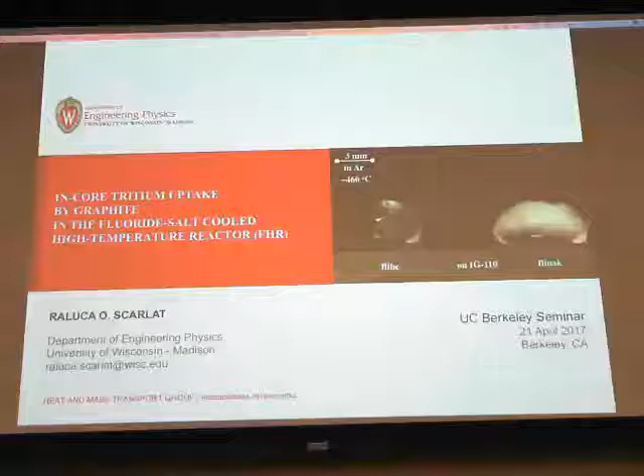She was an undergraduate at Cornell University in chemical engineering. She did her doctoral work here under Per Peterson. Before her doctoral studies, she worked at GE and ExxonMobil.

In 2011, she advised Hitachi GE in Japan on post-Fukushima changes to severe accident guidelines for the Japanese fleet of reactors. In her current work, she studies thermal hydraulics, chemistry, and mass transport in molten fluoride salts. She works in heat and mass transport, thermal hydraulics, nuclear reactor safety, design, and engineering ethics.

I had the privilege in 2013, we were both Minner Fellows, the Warren and Marjorie Minner Foundation, which gave a large grant to the university to sort of instate engineering ethics into the curriculum here. And so we spent a week together with Professor Junhong Han, Bill Kastenberg, and other experts in engineering ethics here as well. She has a great commitment to engineering ethics, has created curricula and so forth.

Without further ado, the title of her colloquium today will be In-Core Tritium Uptake by Graphite in the Fluoride-Salt-Cooled High-Temperature Reactor, FHR. Thank you very much for the introduction, and thank you everybody for being here and for coming here on a Friday afternoon.

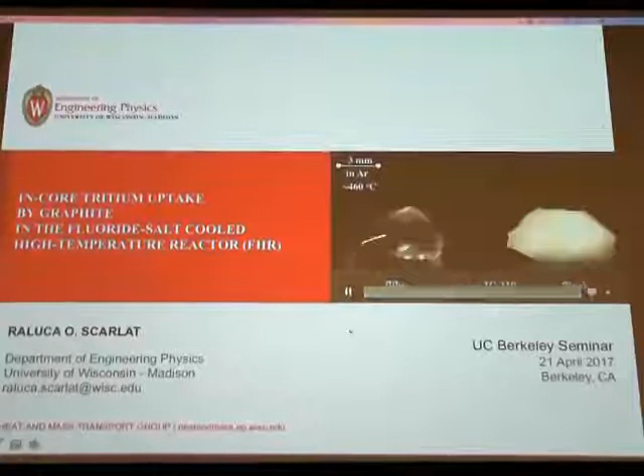Molten salt media are used for separation, so pyroprocessing, and they've also been proposed as coolant for fusion and fission reactors. And so to give you an idea of the type of materials that we work with in my group, is it possible to turn down the lights just a little bit just for a second?

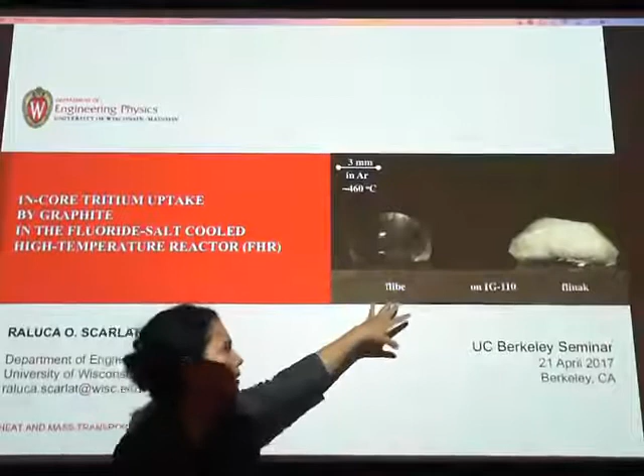And so what you see here are two droplets of salt that are melting on a nuclear graphite surface. This is flibe, and you can see that this salt is recirculating. And what's remarkable about this is that this is a 3 millimeter droplet. The movie is sped up about 8 times, so it's a little faster than real time. And the temperature gradient is probably very small.

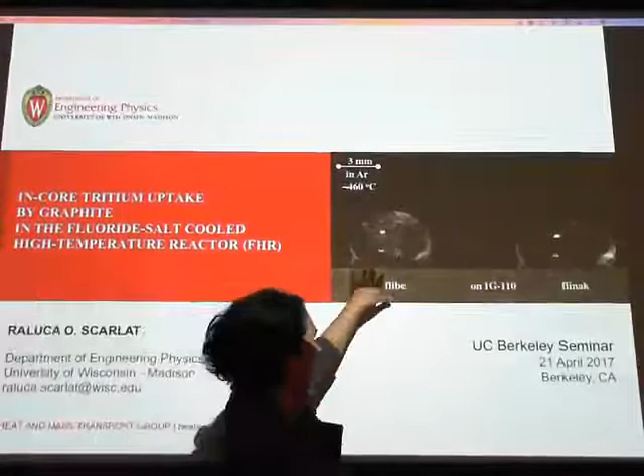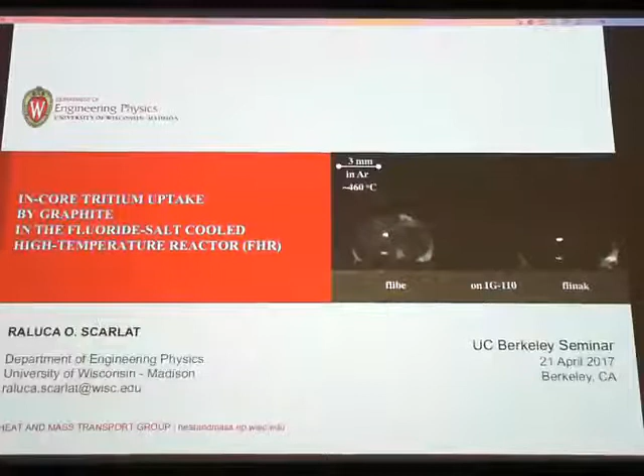What's happening here is that the surface of the droplet is radiating out to a colder lid, and the bottom of the droplet is hot, and that very small thermal gradient is creating a recirculation within the pebble. What's also remarkable is that you see this skin that's forming, and that's the frozen liquid that's melting and freezing and melting and freezing. And so these are some of the problems that I study.

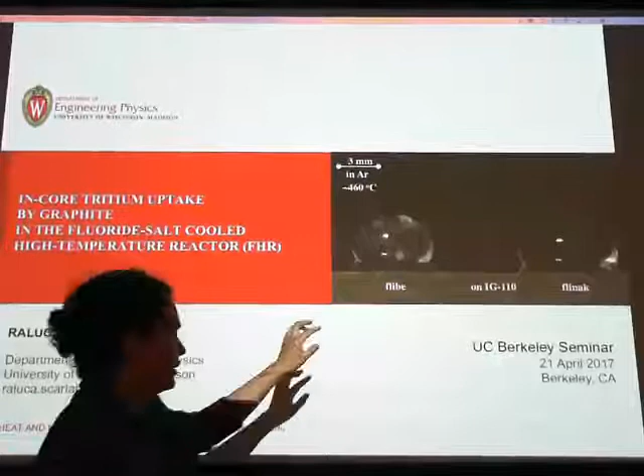How do isotopes transport between phases, between liquids and solids, and between gases and liquids and solids as well? It's harder to see, but there are bubbles in there as well circulating. So we'd like to know how isotopes transport. And also what's remarkable is that these droplets that you see are at 460 degrees Celsius, and they're at atmospheric pressure. And so we can do high temperature separations and high temperature reactors at atmospheric pressure, which has an inherent safety advantage.

So that's one of the motivations of studying these kinds of liquids, is that they have inherent safety features and passive safety features. Now another motivation is that we really need clean sources of energy quickly, and we need to make sure that the new sources of energy that we come up with are clean and sustainable.

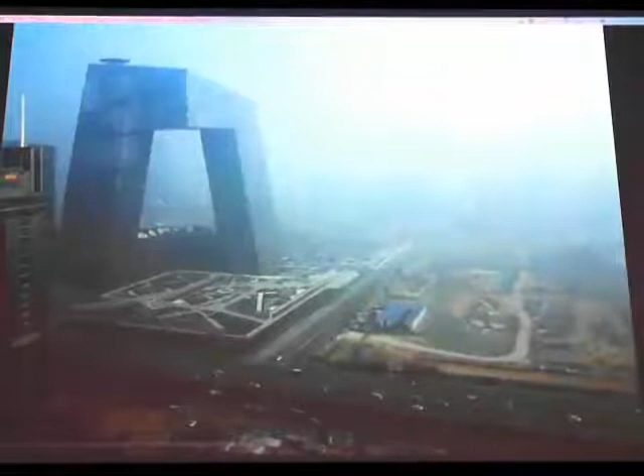And so we have to figure out the safety analysis of the reactors as well as the entire fuel cycle, and to make sure that we're not making a bigger mistake than we've already made with other sources of energy. So that is the background and the motivation of the work that I do. And so now I'll tell you about one of the problems that I tackle, which is tritium transport in a specific system, namely reactors that are cooled with molten salts and that have solid fuel.

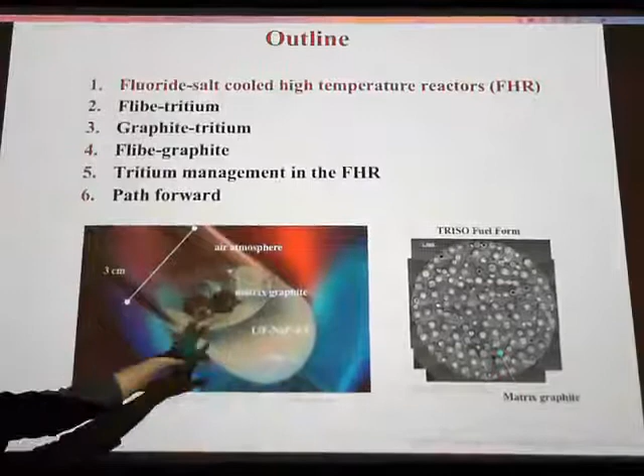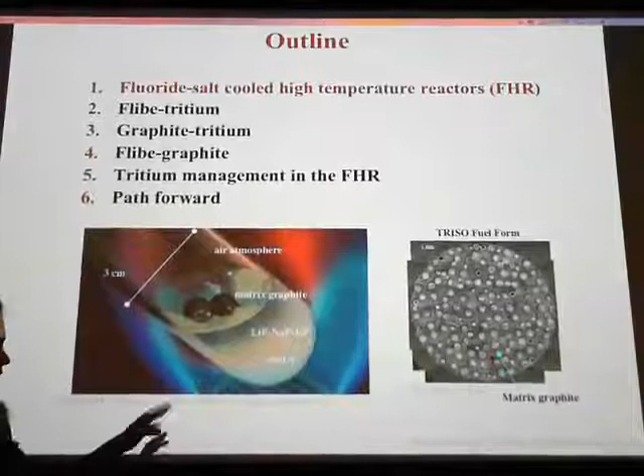And so it's in air. Obviously, it's not blowing up or exploding or combusting, so that's good. This fluid is inert in air. However, it is changing chemistry slowly, and so you can see that there's some sedimentation here that comes from the fact that you're beginning to form oxides from air exposure. And so that's going to begin to change the chemistry and the way radioisotopes partition within your fluid. And so most of the work that we do is in an argon atmosphere, in an inert atmosphere.

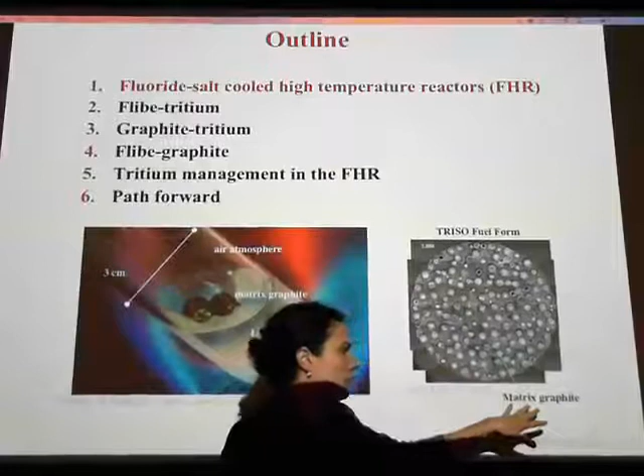And then this is a cross-section of what a fuel element would look like. You would have TRISO particle-encapsulated fuel that retains fission products within the particle, and these particles are embedded within a graphite matrix. And so I highlight the graphite matrix because what we study is the transport of tritium from the salt into this graphite matrix.

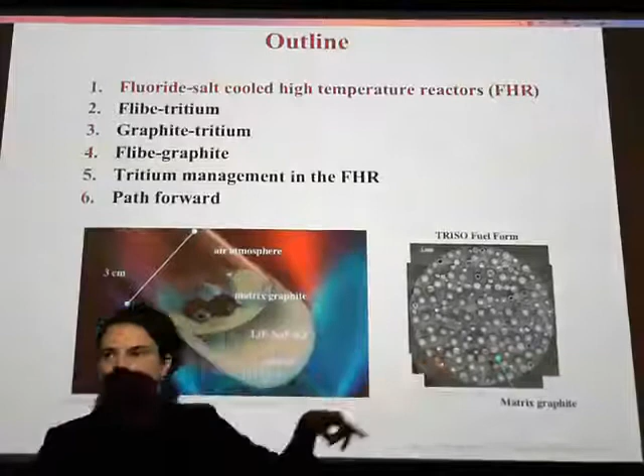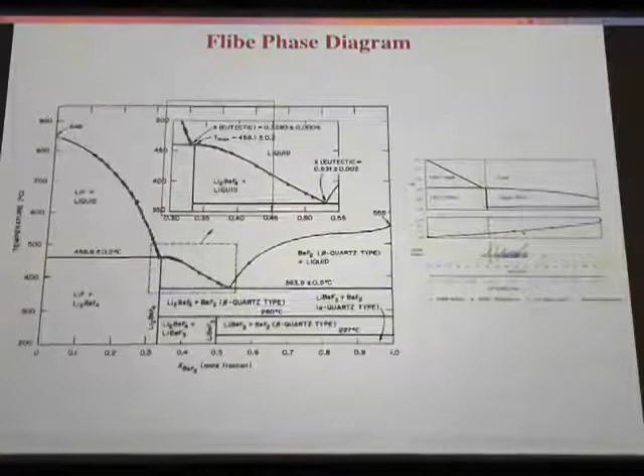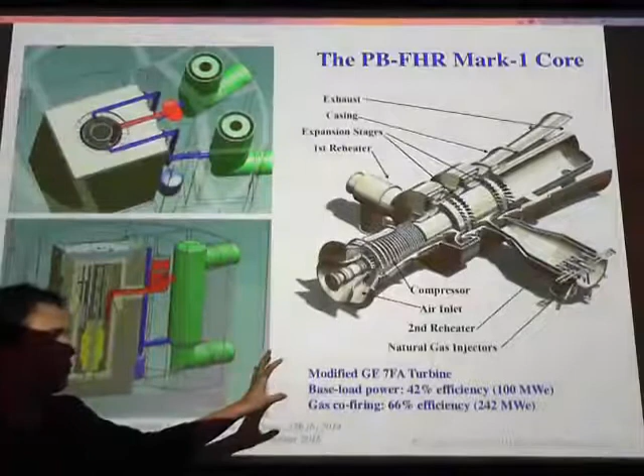So that being said, if you take this coolant and this solid fuel and put them together, this is what a reactor design might look like. You actually start the design from the turbine and then design a reactor to fit the turbine. And there's so many of you here that have been part of generating that design that I will just say that this enables us to produce peak power with nuclear energy, which puts nuclear energy in a different market, which then gives it maybe a bigger chance of competing with fossil fuel and displacing fossil fuel as a source of energy. And so that's a good reason to work on this technology, to try to make it work.

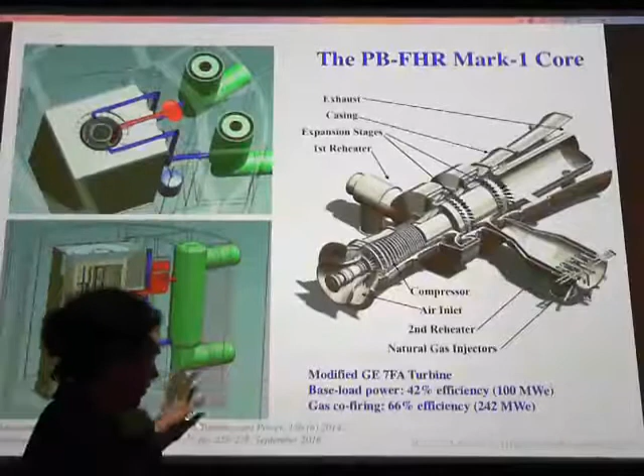And then this is applicable to fission systems. It's also applicable to fusion systems that might use the same coolant for tritium breeding and also for heat removal. And so the fact that these coolants remain single phase up to high temperature enables them to run gas turbines, which can then do power peaking by gas co-firing.

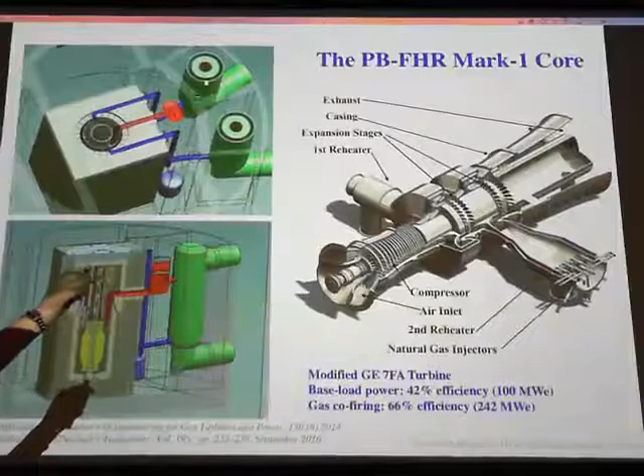So this is the system that we have. Here's a core. The salt flows in, down, up, out, and over to a salt-to-air heat exchanger. This is a pebble bed with fuel, and so the salt flows through the pebble bed. As the salt is irradiated by neutrons, it produces tritium, and then tritium travels to the salt-to-air heat exchangers.

The tritium production in coolants is not unique. All reactors produce some amount of tritium of some sort. But what is unique is that we're at high temperatures, and at high temperatures, metallic components are transparent to tritium. So since we have a salt-to-air heat exchanger, the tritium will leak into the air, which will then reach the turbine and be sent up the stack. Since this is an open-air Brayton cycle, you send all the tritium that goes into your turbine up the stack.

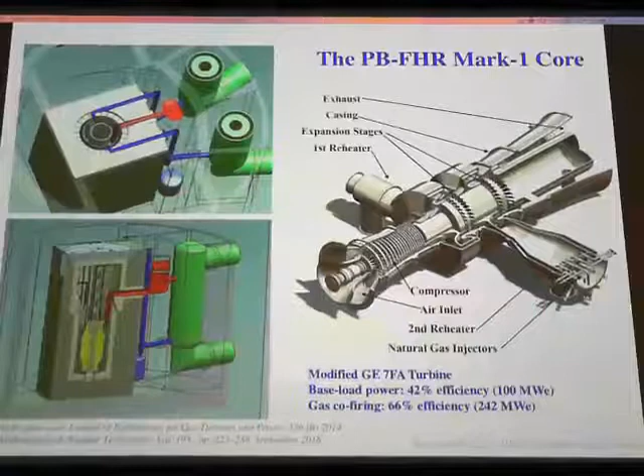And so we need a sink for tritium. And so maybe that sink will be the fuel elements themselves. And that would be a good sink to have, because the fuel elements are removable, and so you have a renewable tritium sink. They have a high surface area by design because they need to remove heat from the fuel, and so mass transport will also be advantageous in that sense. And then they're graphite, and we know that graphite has some affinity for tritium.

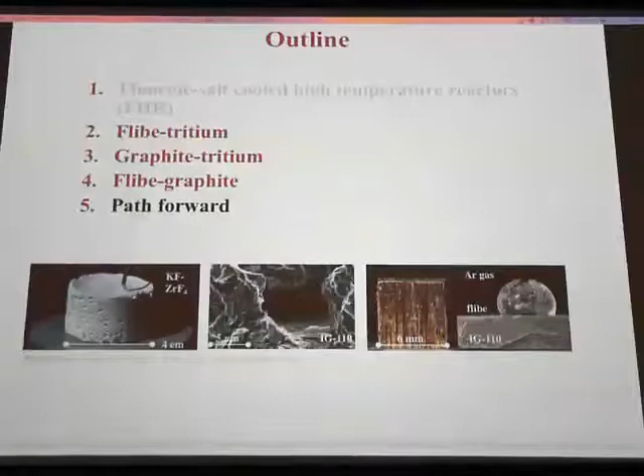And so then we set off to answer this question: can we use the fuel element as a sink of tritium from the fluoride salts? So that's the question that we will talk about for the next half an hour. And there are three components here. There's tritium, there's salt, and there's graphite. We haven't yet run any experiments with the three of them together, but we've run experiments 2 by 2. So I will show you the 2 by 2 experiments, and then at the end, I'll tell you how we hope to bring everything together into a joint experiment.

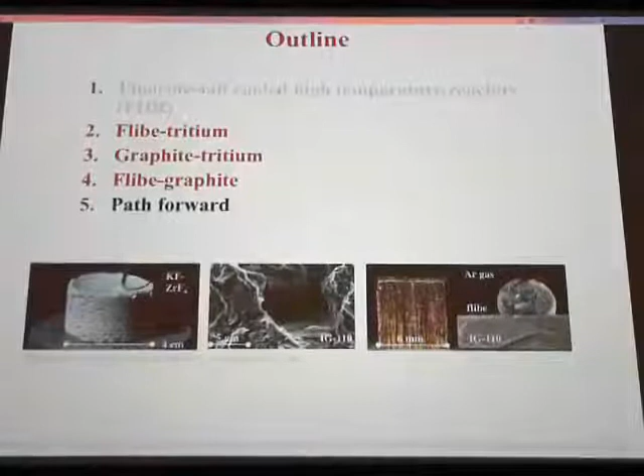So we'll talk about flibe and tritium. Flibe is the coolant of interest here, lithium fluoride, beryllium fluoride. We'll talk about graphite and tritium. Then we'll talk about flibe and graphite.

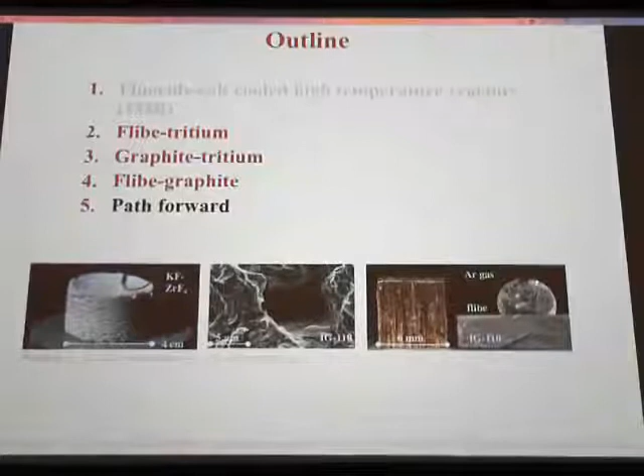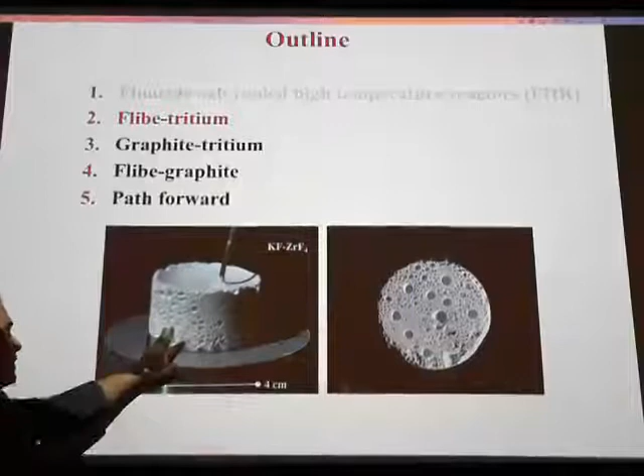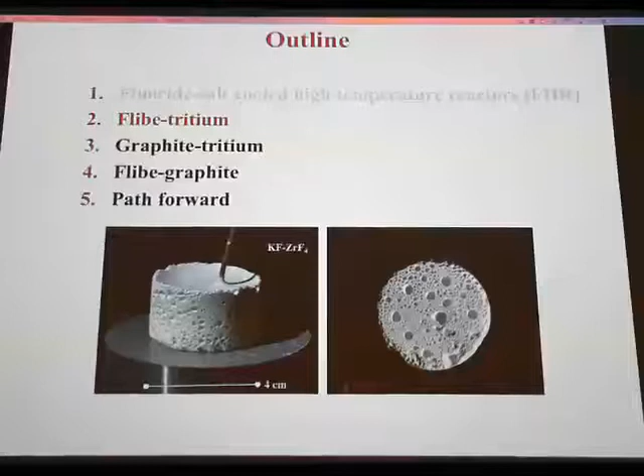So this is not a picture of flibe, it's a picture of potassium fluoride, zirconium fluoride. This is work that's sponsored by Terrestrial Energy. They're interested in thermophysical properties of these salts. And coincidentally, we managed to make a lot of bubbles in this salt. It wasn't our intention, but we did. And I thought that conceptually, it represents the idea that we're producing tritium in the salt, and tritium may be solvated, but it may also be in the form of bubbles. So that's the concept for the next set of slides: we're going to talk about the tritium that's produced in the salt.

However, we also have beryllium as a constituent of the salt, and the natural composition of beryllium is 100% beryllium-9. Beryllium-9, by n-alpha, will produce helium-6, which decays to lithium-6, and so you're continuously producing lithium-6 from beryllium-9. And there's nothing we can do about that. We can isotopically enrich lithium in lithium-7, but we can't do much about beryllium.

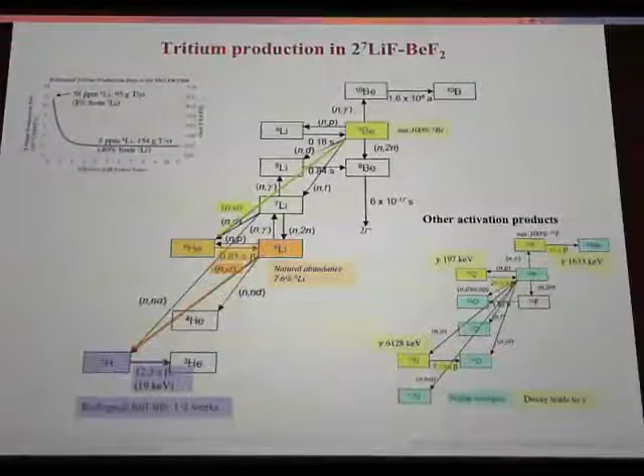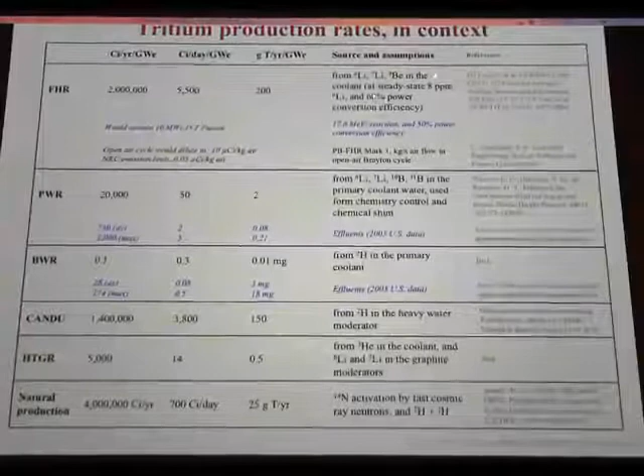And then to put into context the tritium production rates, they're about 200 gram per year per gigawatt electric. And this is assuming the steady state lithium concentration and 60% power conversion efficiency. Since I'm dividing by gigawatt electric, it's important to know the assumptions. So that would sustain about 10 megawatt electric of DT fusion. So in the fusion world, this is not a lot of tritium.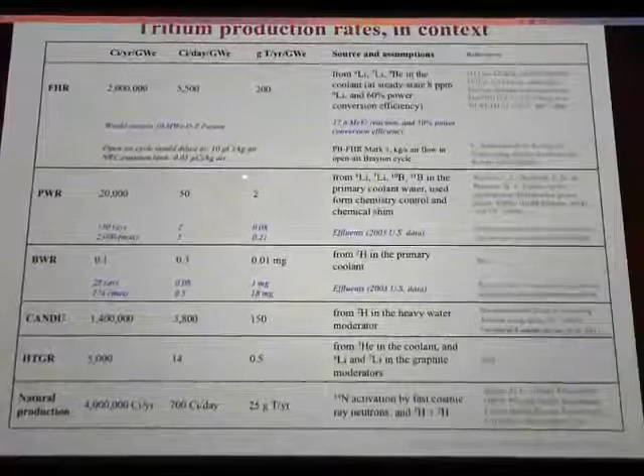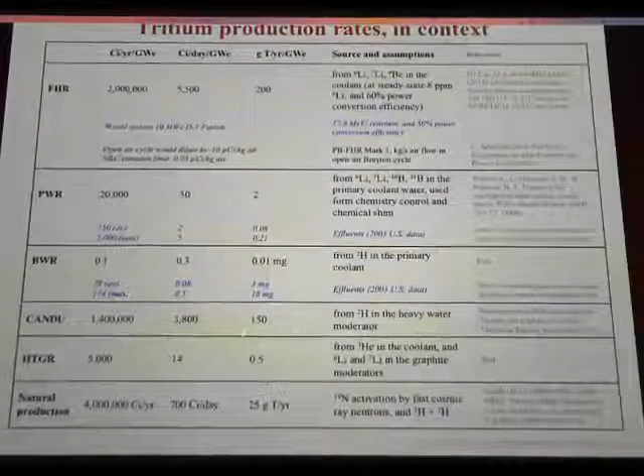However, if you compare it to PWR production, which is about 2 grams, it's a lot of tritium. If you compare it to BWR production, which is about a fraction of a milligram, again, it's a lot of tritium. CANDU is comparable, same order of magnitude. And high temperature gas cooled reactors produce tritium from the helium-3 in the coolant as well as from the lithium impurities in their graphite moderators. And so really any kind of system you can think of will produce tritium in some amount.

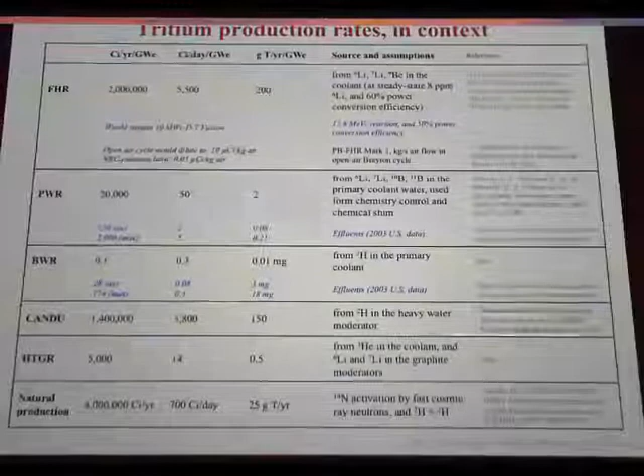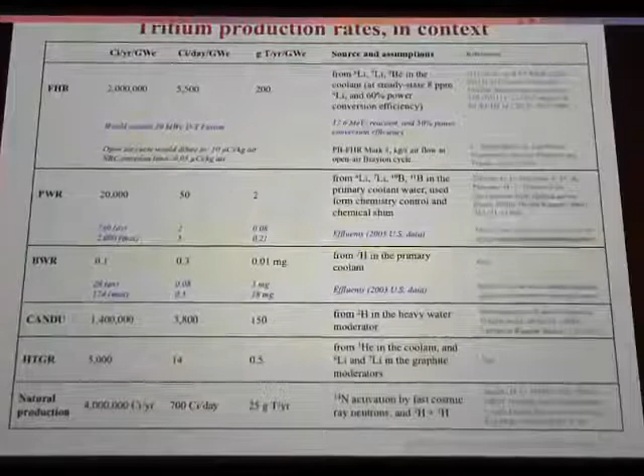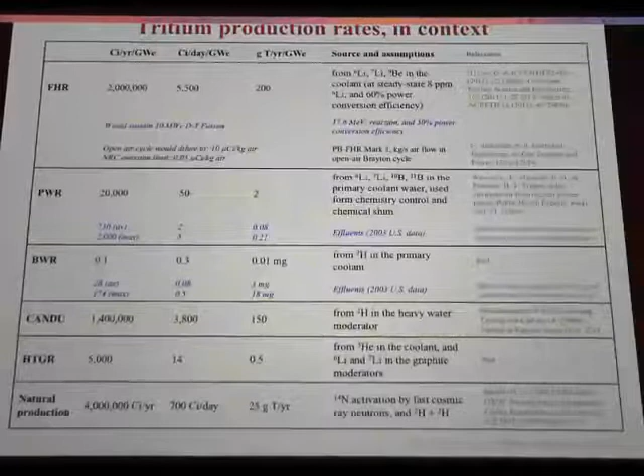Another point of reference to keep in mind is what is released. And so for PWR, there are liquid effluents that are released. The tritium comes from the lithium and the boron. Lithium is used for chemistry control in PWRs. Boron is used for chemical shim, and so that produces tritium. And since it's a water system with valves and pumps and systems that leak in some amount, eventually you end up with some liquid effluents that are released to the environment. And so it's a fraction of a gram per year per gigawatt electric for PWRs.

And then for BWRs, I found it interesting that on the NRC website there's some 2003 data of releases in the milligrams, but the production rate is estimated as 0.01 milligrams, so they must have somehow stockpiled in 2003 and accidentally released it. I don't know what the story is there.

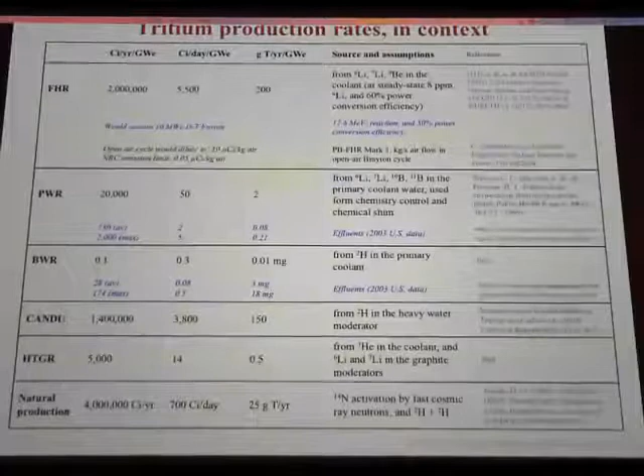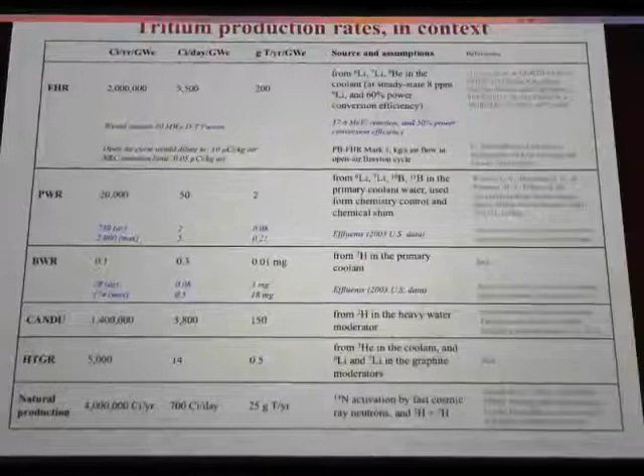And then, let's see, other interesting points of reference. If we were to release all of the tritium out the stack through the air turbine, that provides a dilution stream, just the gas that runs through the turbine. And that dilution would bring it down to 10 microcurie per kilogram of air. The NRC emission limit is 0.05 microcurie per kilogram of air, so we're not diluted enough. We definitely need to do something about the tritium. But regardless, we wouldn't want to send the tritium up the stack even if we had diluted it well enough.

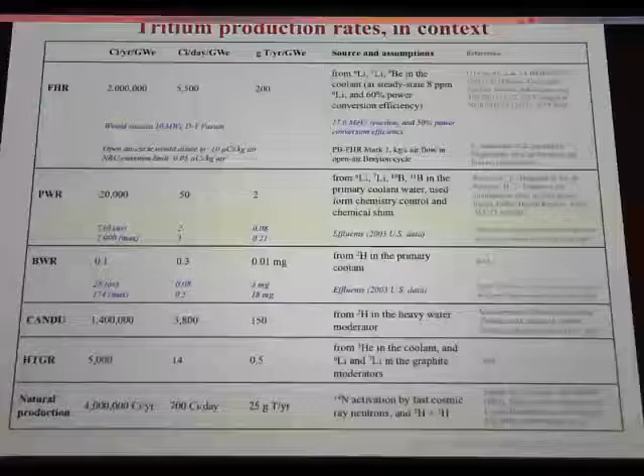And then also it's interesting to note that there is natural production of tritium from cosmic radiation. And it's about 25 gram of tritium per year, so in 1 gigawatt of FHR we produce 8 times that. Okay, so that gives us the context for how much tritium it is that we're producing. And it's produced in the core, and we would like for it to be removed before it leaks out of the heat exchanger to the airstream.

And in addition to having a sink in the system, it's also important to work on tritium permeation barriers on the heat exchangers. That's not going to keep the tritium in, but what it does is it allows you to tolerate a higher concentration of tritium in your primary coolant. And so if you have a higher concentration of tritium in your primary coolant, the residence time of tritium in your primary coolant is longer. And if your residence time of tritium is longer than the residence time of the liquid going around, then that means that you can use a fraction of your stream for your purification system.

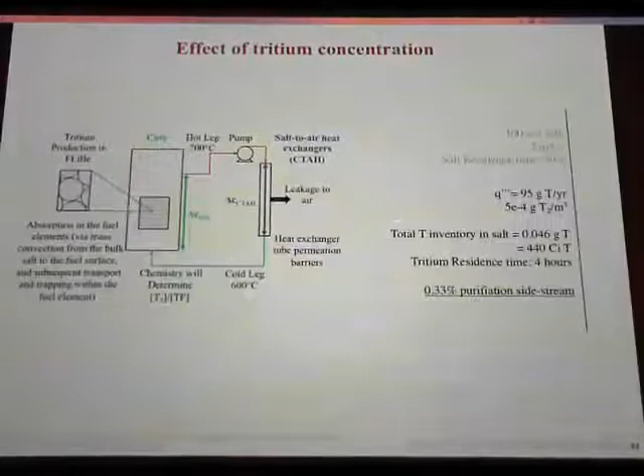So for example, if the tritium production rate is 95 grams of tritium per year, the concentration, let's say, is 5 times 10 to the negative 4 gram per meter cube, and then the total inventory is about 0.05 grams of tritium in the total primary system. We know the tritium production rates, and that gives us 4 hours of residence time for tritium in the core.

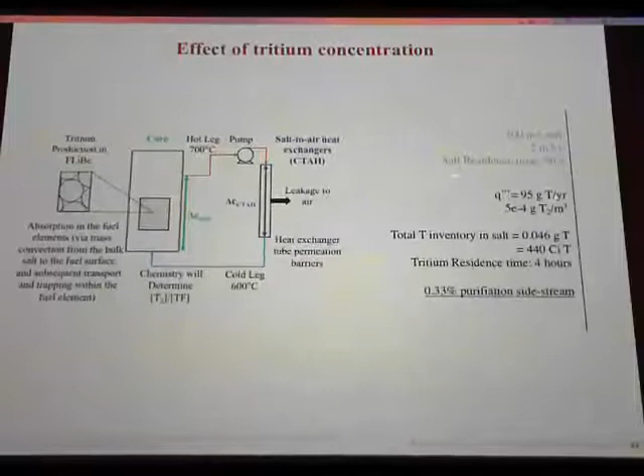We can run the same number on the coolant going around the core. If it runs at 2 meter cube per second, and the total salt inventory is 100 meter cube, then the salt residence time is about a minute. That's actually remarkable, that it takes a minute in full power operation for the coolant to go all the way around the system. This means that in decay heat levels, you're at a half an hour of the coolant traveling around until it makes it back to the core. That's a really slowly evolving system.

So that's nice for safety, so operators have time to make decisions. But sorry, that's an aside. We leave that aside alone. We come back to tritium. So longer tritium residence time means that you can use just a small side stream to purify, to remove the tritium from the core, and so that's convenient.

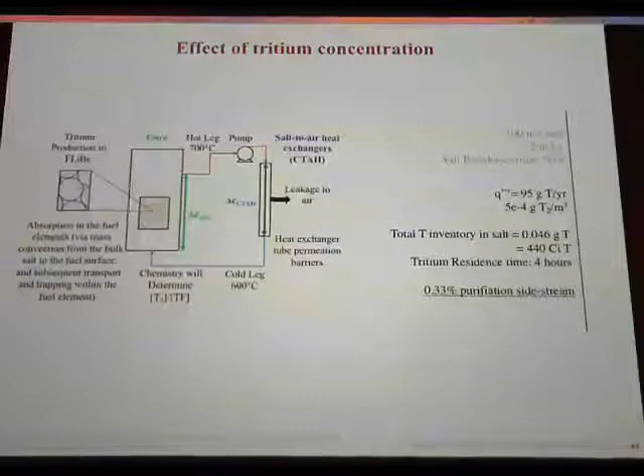Now another thing that a higher concentration of tritium in the coolant does is it gives you a larger term for the mass transport. So if you want to transport tritium from the bulk of the salt to the surface of your fuel elements, there's a mass transport resistance there, and the higher the concentration gradient, the easier it is to remove.

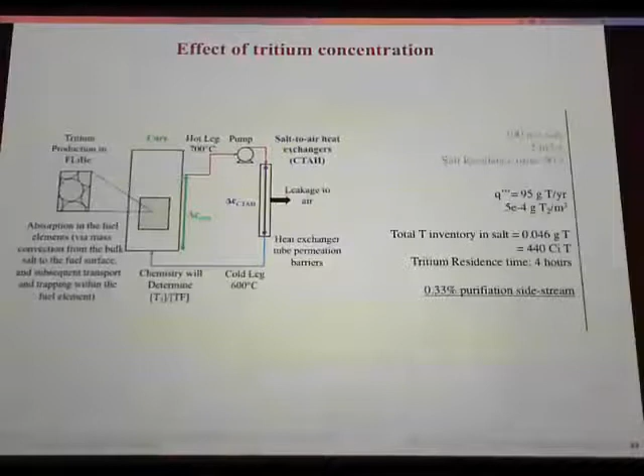So let's look at the mass transport problem. And I know it's a very busy slide, but bear with me. It was important that I put everything in one picture. Okay, so I'll walk you through it. So what you see here is this bulk salt and the salt surface. So here you have the salt-graphite interface. That's the graphite surface, and that's the salt surface. And then you have the graphite bulk, and then you have the gas phase.

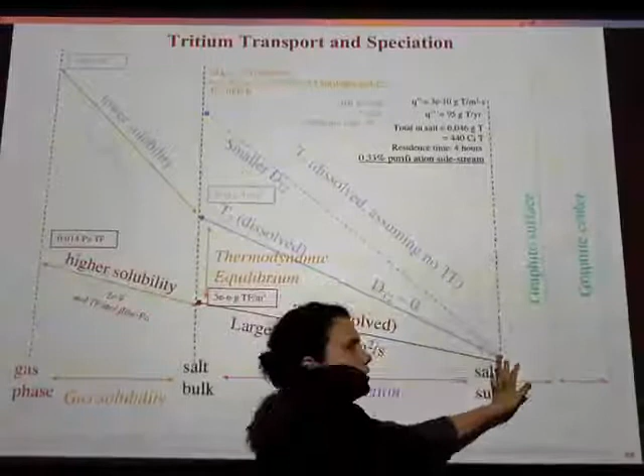So if you assume that you have 0 concentration at the salt surface, and you know the flux that needs to go into your fuel pebble, and you know the diffusion coefficient and the mass transfer coefficient, then you can calculate what the concentration of tritium needs to be in the bulk. Now what's interesting about tritium is that tritium can take many chemical forms. It could be a molecule, it could be an ion, it could be an atom, it could be an anion, but we won't talk about anions. So to simplify problems here, we're just going to talk about molecules and cations. So it can be T+ or T2, let's say.

And T2 won't have a very high diffusion coefficient in the salt. T+ will be the one that will diffuse quickly. And so if you compare the diffusion coefficient of T+, for example, with the self-diffusion coefficient of F-, you'll see that they're sort of comparable. And so that's an indication that it's probably T+ that's diffusing through your salt, not T2. And so what you need is this concentration, 10 to the negative 6, to drive the mass flux in. And then you know that T+ is in thermodynamic equilibrium with T2. And so that thermodynamic equilibrium is set by how you do the chemistry control in your system so that you don't corrode your metallic alloys.

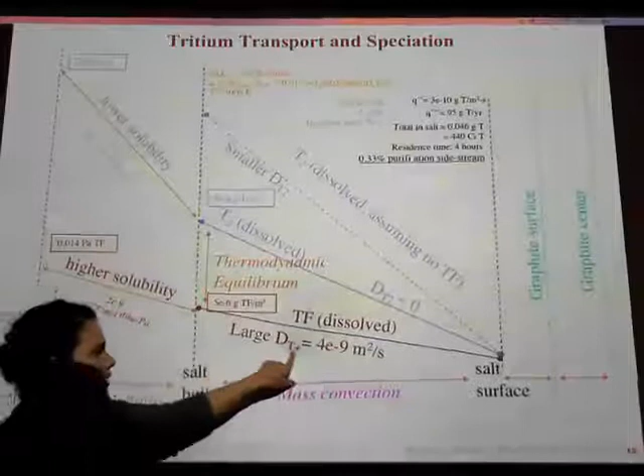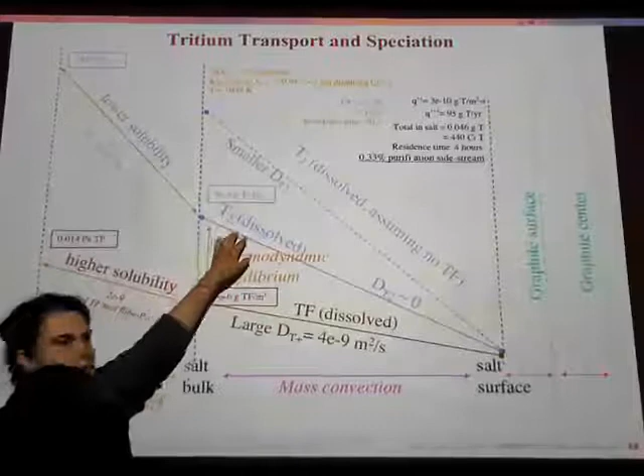So just like T2 can be in a 0 oxidation state, so it's T2 covalent, they share electrons, or in a +1 oxidation state, it's missing an electron. Same thing with metals. You can have chromium 2+ or chromium 0. We like to keep chromium in a 0 state. So we like to keep it in our pipes, in our structural materials. If it goes into a 2+ state, then it dissolves in the salt, and so we're corroding it. So you're going to set your chemistry control system so that it's somewhere towards the 0 oxidation state. And it's going to have an effect on tritium as well. So it's going to be pushed towards here.

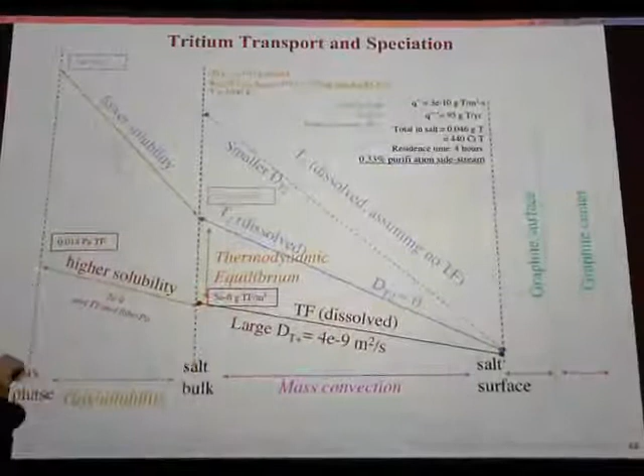And so if you need this T+ concentration to drive the mass flux, it means that you need this T2 concentration that's in equilibrium with this T+ concentration. So then from there, each of these species has a partial pressure above it, above the salt in the gas phase. And so we can calculate what that is. For T+, it's 0.01 Pascal of TF. And then for T2 it's kind of high. It's 180 Pascal T2. It's higher than I would have expected. I think that's going to be a pretty good driving term for leakage through the heat exchanger.

It's lower than any data that we have. So that means that we need data at low partial pressure. Most data is at 1,000 Pascal and up. So that's where, and then you can go and calculate the tritium inventory, and that's where those numbers came from that I showed you before.

But the main takeaway here is that tritium transport is tightly coupled to chemistry control, which is tightly coupled to corrosion. And T2 is the one that diffuses through the metallic components. T+ does not diffuse through metallic components. And so if you're controlling your chemistry to be more towards this side, that means that you're going to have a higher driving term for leakage out the heat exchanger.

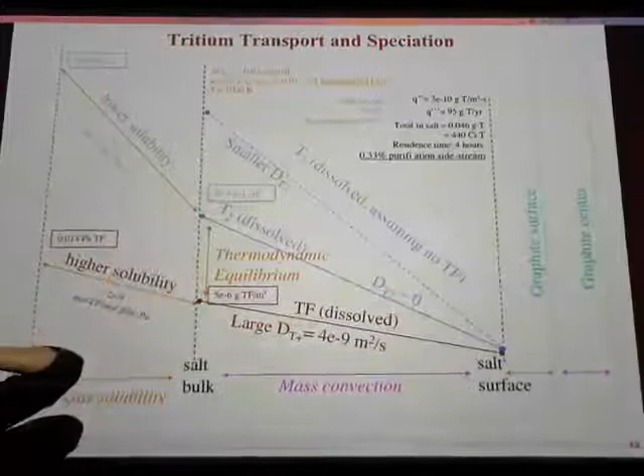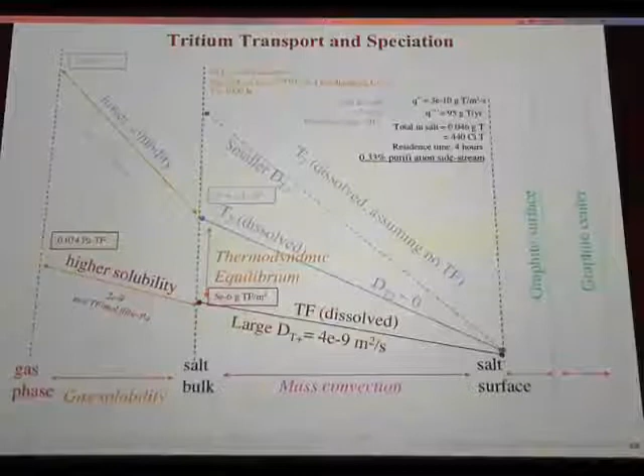So maybe we can play with the chemistry, so it's different in the heat exchanger and in the core. I don't know. But it's a degree of freedom that we have to consider. All right, so that was the first part, the flibe tritium. We talked about tritium production, other activation products, the tritium concentration in the salt, and then the speciation, which is really important.

The next topic is graphite tritium. And so what you see here are two types of graphite. This is nuclear grade graphite, this is matrix graphite. This is what's in the fuel, the removable fuel elements. This is what's in the reflector blocks, and also possibly in some of the pebbles, because you have a pebble bed. And you could put fuel, but you could also put pebbles of other materials.

And most of the data that exists in the literature is from nuclear grade graphite. Matrix graphite hasn't been well characterized, primarily because it's scarce. Not a lot of people manufacture it. So we're very grateful to Oak Ridge. Tim Burchell's group at Oak Ridge National Lab has provided us with matrix graphite, and so we're very grateful to them for that.

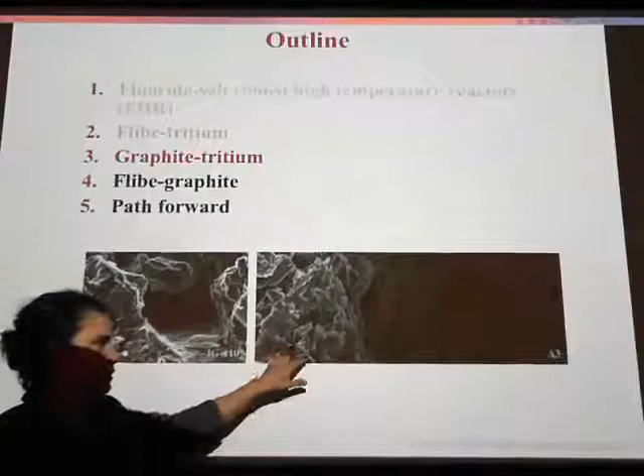And what we're trying to understand here is what is the difference between these two materials, so that we know if the knowledge that we have from nuclear graphite, IG-110, is translatable to the matrix graphite.

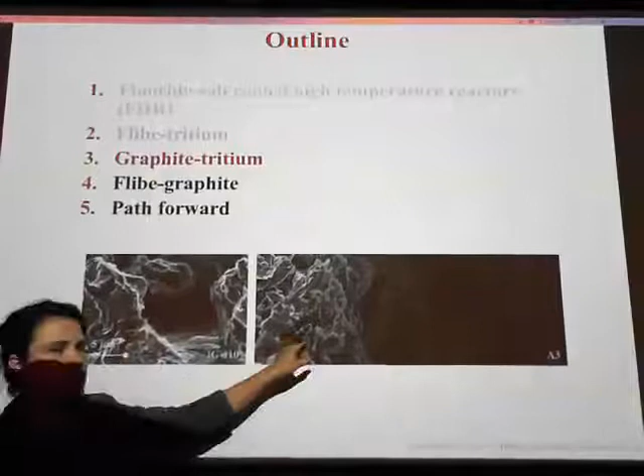So the first thing we did is there was one data set from the molten salt reactor experiment where they took a graphite stringer, a long graphite column that had been immersed in the salt for 1.5 years during reactor operation, and it had taken up tritium, and they took slices of it and quantified the tritium profile. And so we wanted to know if we could match their data with a diffusion model based on diffusion parameters for hydrogen in nuclear grade graphite.

And the answer is no, we cannot, because the shape of that profile just does not fit the shape of a diffusion profile. What you have is a very flat gradient in the center and a very sharp gradient at the surface. So there are two choices. Either the graphite is not homogeneous, so somehow its diffusion coefficient is different in the outer 0.2 millimeters, 0.5 millimeter, or there's a different mechanism of transport that's happening. And it's possible that it's both.

We're very grateful again to Oak Ridge. They gave us one of their graphite columns to characterize. Fred Peretz and Dave Holcomb helped make that happen. The molten salt reactor experiment has never been decommissioned, which I think is a huge failure in demonstrating that technology. All of you out there who are going to go start reactor companies, make sure you design them for decommissioning.

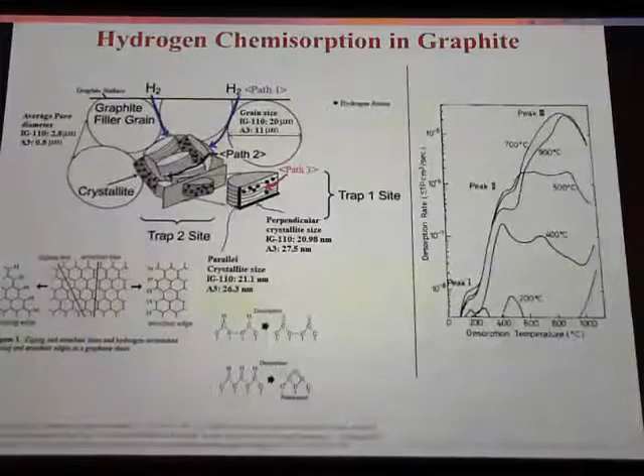Okay. So one way that the behavior of these traps has been studied is with thermal desorption analysis. And so a graphite that's been exposed at 700 degrees Celsius has desorption peaks at various temperatures which correspond to different types of trapping sites that have different energies. So we care about that because we want to have a chemical transport model for hydrogen moving into the graphite so that we can match that profile that we saw in the MSRE.

Another thing to keep in mind is that the diffusion coefficient and the trapping site density evolves with irradiation. And so doing measurements on non-irradiated graphite is probably very incomplete in terms of having the full picture of the lifetime of each fuel element. And so what's important, however, is to understand mechanistically what are really the microstructural parameters that you care about for the graphite in order to then predict the trapping site density and the diffusion coefficient.

And so that's the mechanistic side, and then at the same time you need to push the engineering too and just irradiate some graphite and measure how much and how fast it absorbs. Now how fast is also important. So we can't treat the graphite as a point absorber. The time of absorption into the graphite is also important.

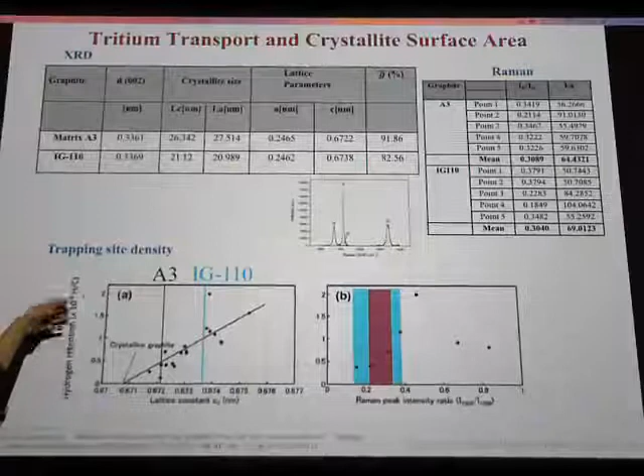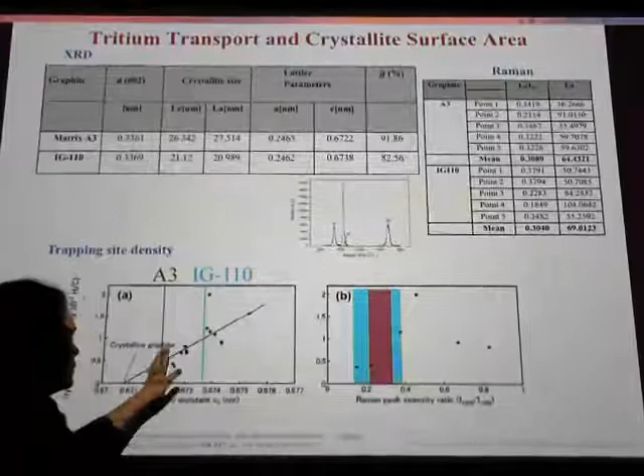Okay. And so then what microstructural characterization of these materials enables us to do is to predict things like trapping site density. And so here is some data for trapping site density versus the lattice constants of those graphite crystallites, and then this is where we fall for the materials that we've characterized. So a few takeaways is that hydrogen chemisorbs, the timescale matters, and the irradiation effects are important. And then lastly, FLiBe and graphite will be a very quick conversation because I have 10 minutes left.

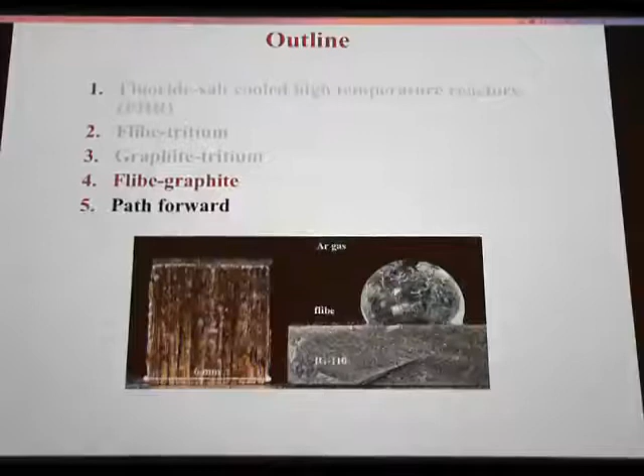So we want to understand if we were to take the hydrogen graphite data and the hydrogen salt data and put them together, would we get the right number for hydrogen from salt into graphite, or is there some sort of interface reaction that happens between the salt and the graphite that changes the tritium transport? And so we exposed nuclear graphite to FLiBe for 12 hours at 700 Celsius, and we observed these intriguing spheres. And we want to know what they are.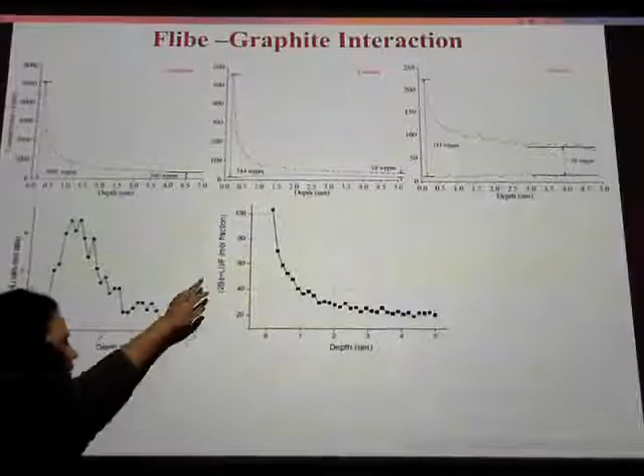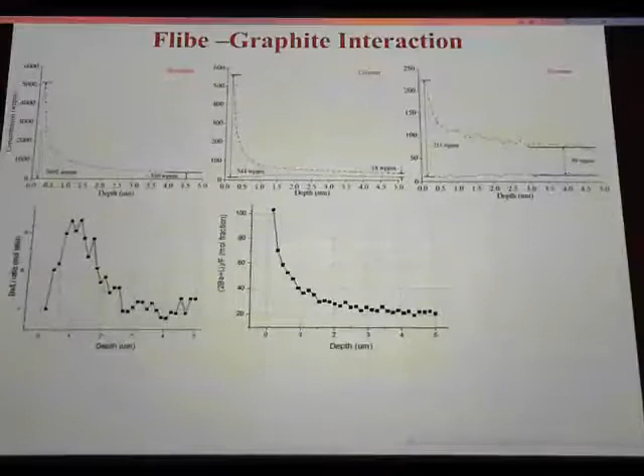Mass spec shows us that we have beryllium, lithium, and fluorine down to at least 5 microns. And okay, something's happening, something's going in. But what we just learned yesterday, this is data from yesterday, is that the metal to fluorine ratio is 100. So we either have metals or carbides or hydrides, but we don't have fluorides, which is, yes, I agree with the reaction. So, fascinating.

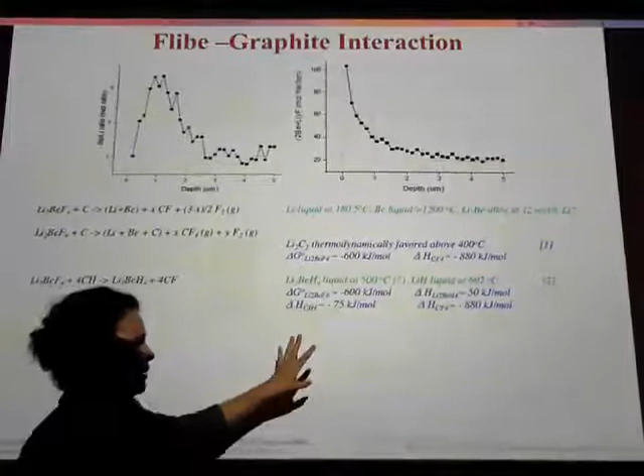So these are some of the things that might be happening. There's some data on the fact that lithium carbide is thermodynamically favored at 400 Celsius. To keep in mind is that lithium is liquid at 180, so we might be forming liquid droplets of lithium that then freeze? I don't know. It's puzzling. I just got this data yesterday, so I apologize if the analysis is not complete, but it's puzzling. And we should figure out what's happening, because it would definitely affect tritium absorption. If you have metal, then tritium will form hydrides, so that's going to be different than tritium forming chemical bonds on graphite. So we need to figure that out.

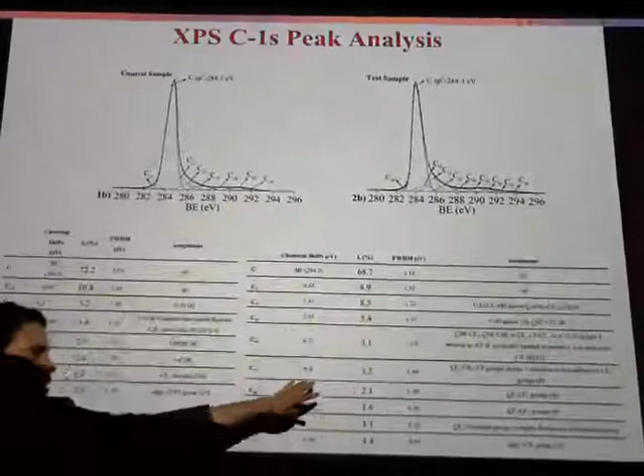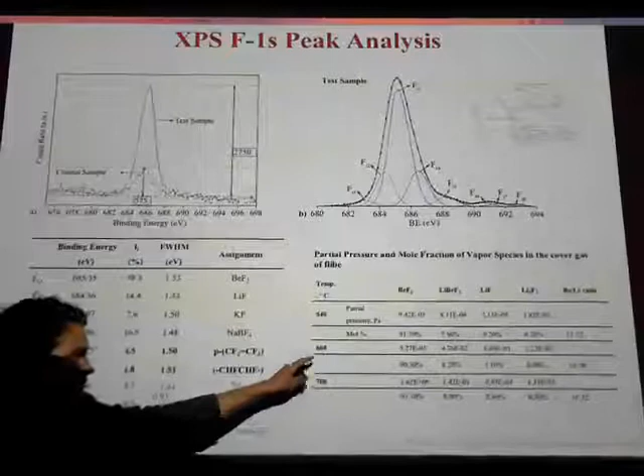Now, another thing we learned from XPS analysis of the graphite is that the graphite fluorinates. So the sp3 carbons go from 10% to 5%, and then they show up as fluorinated graphite. So we fluorinate the graphite. Not much, but a little bit. And then that's also corroborated by the F peak on XPS, which shows the same functional forms as we saw in the carbon peak. So graphite fluorinates.

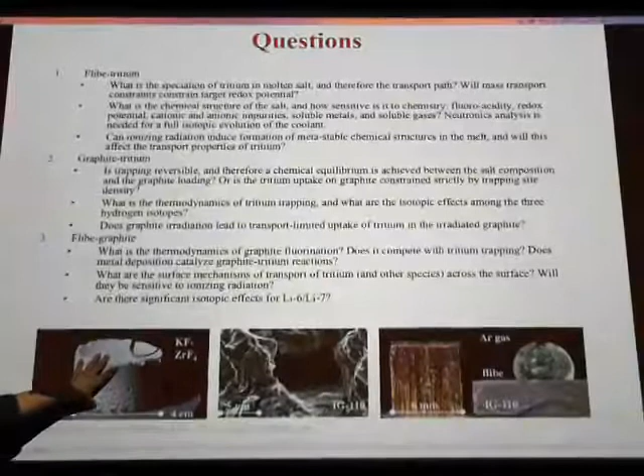Okay, so putting all of those together, we still have some fundamental questions about tritium, about the speciation in the molten salt and how that affects the transport path. We still have some important questions about hydrogen and graphite and how irradiation affects tritium uptake in graphite. And then we definitely have some interesting puzzles around FLiBe and graphite.

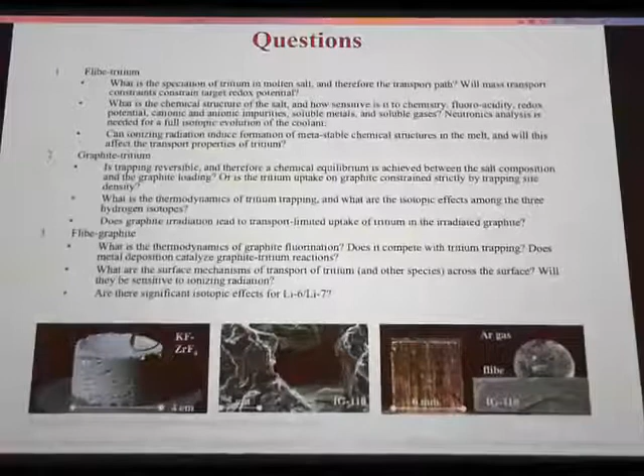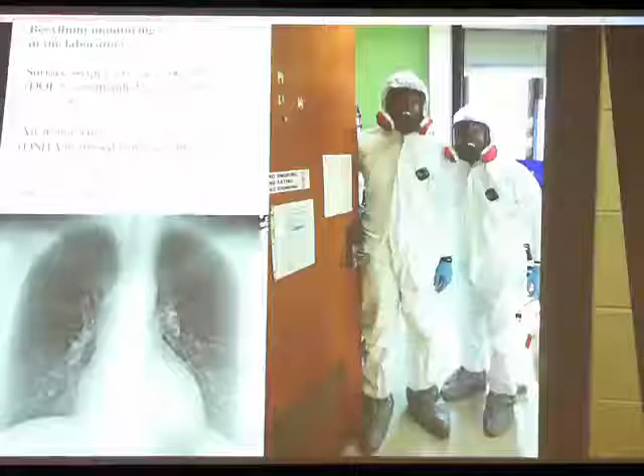Then we work with beryllium, and so we take beryllium safety very seriously. All of the beryllium that we work with is contained in glove boxes, and our labs are not beryllium contaminated, but we do monitor the labs for beryllium contamination, and anytime we do cleaning, we suit up just in case there's hotspots of beryllium that we haven't detected. So we do periodic house cleaning where we suit up and we scrub the floors. And then anytime we open the glove box or do any retrofits to the glove box, then we suit up. So we do surface wipes and air monitoring. And we aim for 0.2 microgram per 100 centimeter square for surface swipes, which is the DOE recommended action limit.

And so the interesting fun fact here, aluminum plants use fluorides as a solvent for electrowinning of aluminum. It's a similar process as you would use for pyroprocessing spent fuel. And the aluminum ore has beryllium as one of its constituents, and so it accumulates in the electrochemical pot, and it's a beryllium exposure hazard for the workers because it's an open pit that they sometimes do maintenance on. And so there's some data from the aluminum industry on how to monitor and what the background levels are.

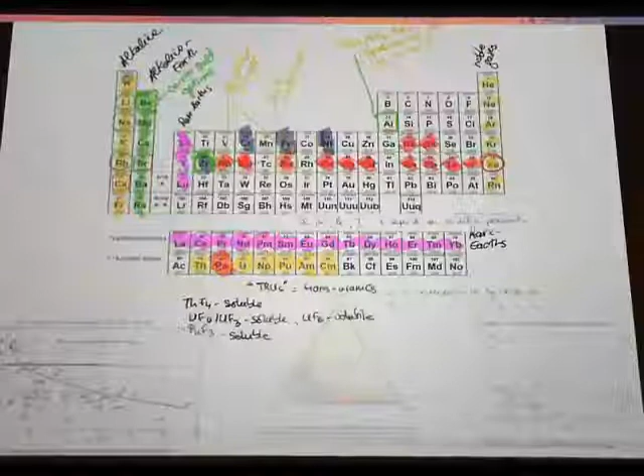It's important if you're going to run a liquid fuel reactor so that you know what precipitates out and what goes up in gaseous form. It's important for solid fuel reactors so that you know if your fuel leaks, then where your radioisotopes end up. And also if there's a severe accident, you want to understand what the transport paths are to the environment.

So this is marked up. This is to show that everything is so very much in progress and not well understood. So it's all sketched up and overlapped. That's how I see this field. There are a lot of very interesting questions.

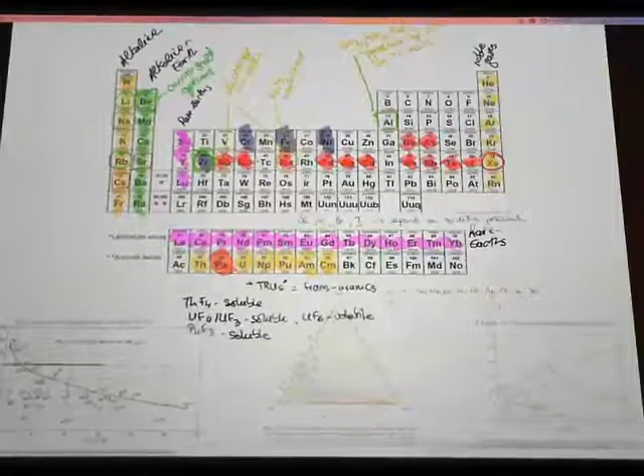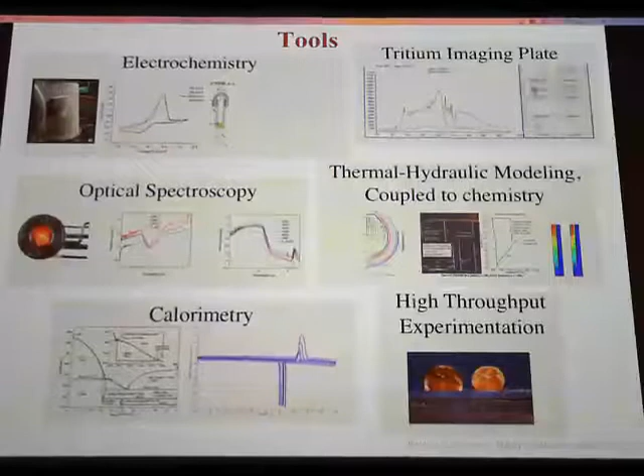And so because this field is so big and there's so many interesting questions, another thing that we really need is high throughput experimentation so that it doesn't take a week or a day to do one sample point, so that you can have a grid of maybe droplets 10 by 10 that you put on a grid of printed electrodes, and then you investigate optically from the top, and then you can scan the entire composition range. And so we've been doing some thinking around how do we do high throughput experimentation on high temperature liquids.

And I will leave you with a video which originated from us wanting to measure the contact angle of the salt, and we were doing this work with the photography professor again, Gregory Hirschbaum, and he said, "Oh, can I have some fun now? Can we freeze them and see what they look like, and I'll take a video?" And so we said, "Yeah, sure, we'll have some fun." And so this is what we saw.

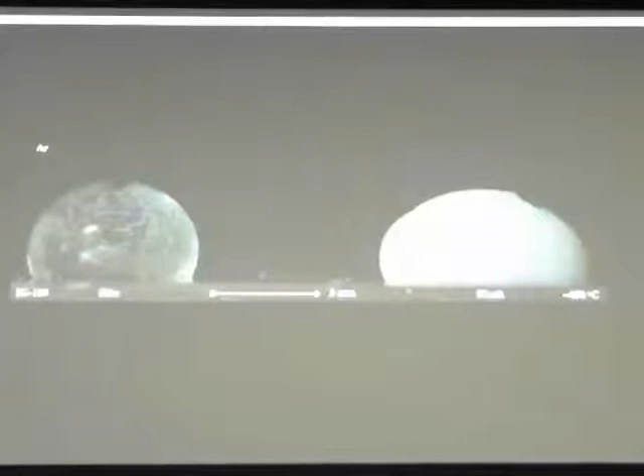This is FLiBe again. It's circulating furiously here. This is 8 times sped up video, and then this is FLiNaK, and you'll see it starts to freeze from the top, and then you have these crystals that drop, and then it freezes from the bottom. And then you'll see FLiBe begins to freeze from the bottom quite differently. So there we go.

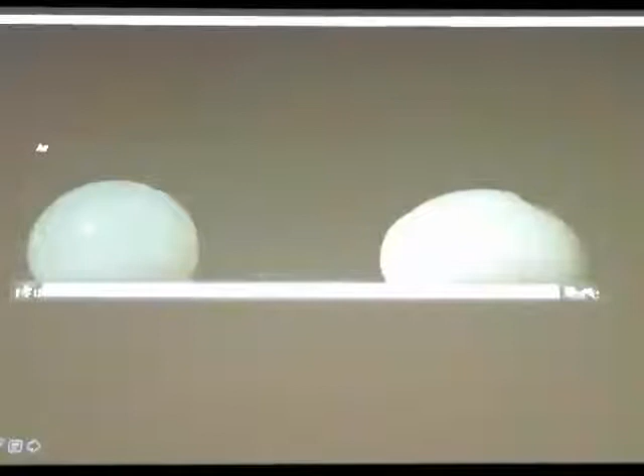And so this, of course, has implications in terms of both thermal hydraulics and mass transport, and it helps us with the high throughput experimentation as well. So with that, I'll take any questions.

I have 2 questions. One is about methane and acetylene production, because Olander studied that to some extent. In your temperature range, that was the primary process he saw. Okay. It was the transport of the tritium off in the form of tritiated methane and tritiated acetylene. Okay. And the other question is Sievert.

Okay. A lot of these tritium permeation processes follow Sievert's law, where the throughput goes like the square root of pressure, not like the pressure, because the atoms have to go single file through some lattice. Yes, yeah. So do you have any Sievert coefficients to worry about in this work, or are you all in such a high pressure regime that it's all Fick's law? No, we do. Actually, in the melt, I simplified the problem a bit when I said that there's T2 that's solvated.